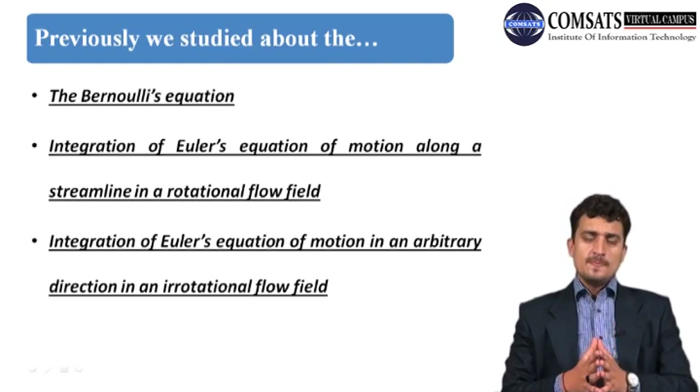आज इन्हीं चीज़ों को लेके आगे चलते हुए हम एप्लीकेशंस की तरफ जाएंगे, प्रैक्टिकल एप्लीकेशंस की तरफ, कि हाउ वी अप्लाई द बर्नौलीज इक्वेशन टू सॉल्व सर्टेन प्रॉब्लम्स ऑफ फ्लूइड मैकेनिक्स।

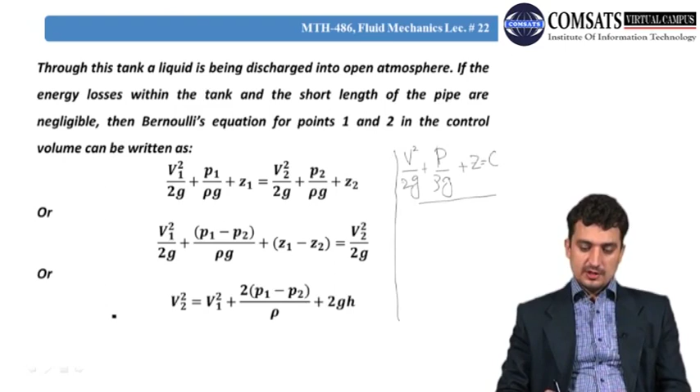So this was a very simple example of a tank. You can generalize it for any sort of tank, provided the energy losses within the tank and the short length of the pipe are negligible. By short length of the pipe, we mean this length is negligible, this short length out of the tank is negligible here.

Now this Bernoulli's equation can also be applied for liquid flow over a dam or a spillway. अगर आपको कोई डैम या स्पिलवे देखने का इत्तफाक हुआ हो तो आपने नोटिस किया होगा कि जब डैम के स्पिलवेज या उसके दरवाजे बंद कर दिए जाते हैं to store the liquid in it, और फिर जब वो खोले जाते हैं तो water flows out of them। तो जिस तरह water उन spillways से बाहर निकलता है, आप pressure, velocity, या elevation of the liquid calculate कर सकते हैं, Bernoulli's equation का इस्तेमाल करके।

For liquid flow over a dam or spillway, the Bernoulli's equation for an inviscid flow can be applied, provided friction losses for the short reach of flow under consideration are negligible. Obviously, since water is a viscous fluid or a Newtonian fluid, it will show viscous effects, but if we can neglect those viscous effects and frictional losses, then we can use the Bernoulli's equation, because it is the integrated form of the Euler's equation, which is valid only for inviscid or ideal fluids.

Now for the topmost streamline in the control volume, the pressure is atmospheric pressure and therefore constant at each point, and we may write Bernoulli's equation for points 1 and 2. अगर बॉटम पे और टॉप पे प्रेशर सेम और एटमॉस्फेरिक प्रेशर के इक्वल रख के उन दोनों को इक्वेट किया जाए तो हम simply terms containing the pressure को cancel out कर सकते हैं और remaining terms को compute कर सकते हैं, जैसा मैंने इस equation में किया है।

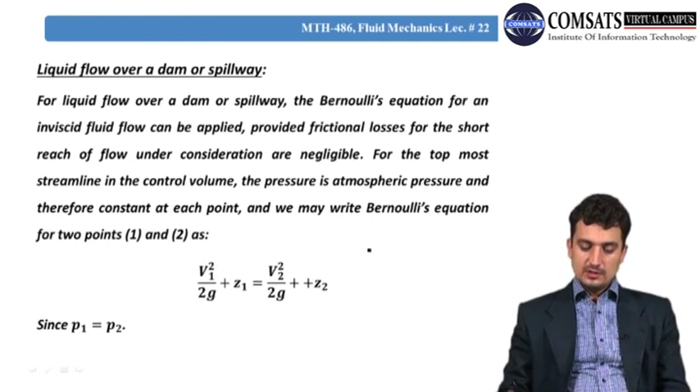So simply you can find out the velocity after the water has passed the spillway and the velocity before the water has passed the spillway, provided you know the velocity and elevation at other locations. अगर आपको किसी एक पॉइंट पे velocity and elevation known है तो आप किसी दूसरे पॉइंट की elevation पता होने के बाद उसकी velocity find out कर सकते हैं, in the case of a liquid flowing over a dam or spillway. The equation can be used to determine the velocity of the fluid at any one point, provided the velocity at the other point is known, and the elevation is known to you.

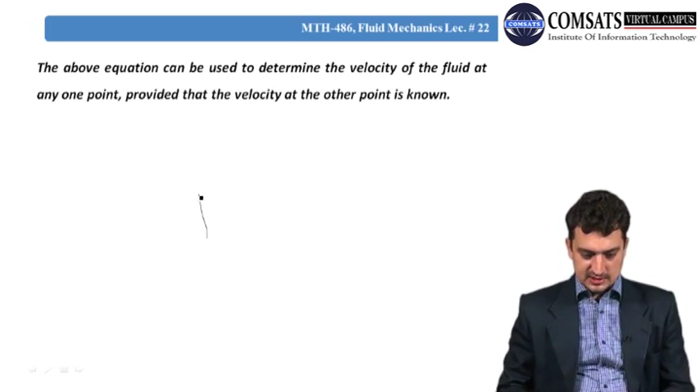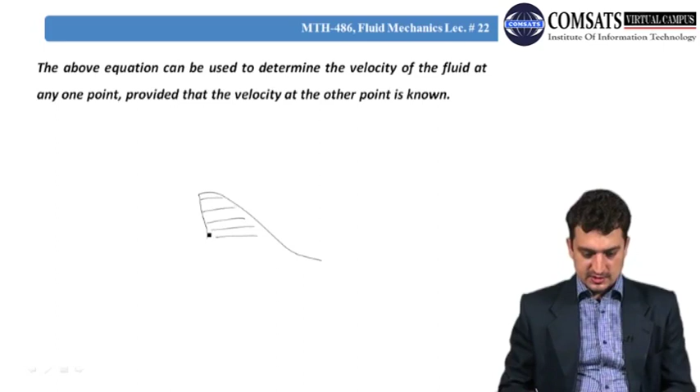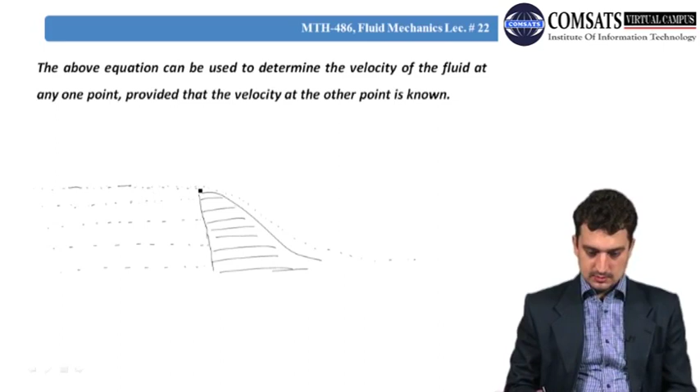और अगर आप इसको थोड़ा सा figuratively analyze करना चाहें तो यह कुछ ऐसा दिखेगा। Consider this as a spillway and water is flowing over it, say like this. I hope you can see these dotted lines which I am drawing here.

So like this, water spills over a dam or a spillway, and if you know this height, say इसको point 1 कह लें और इसको point 2 कह लें, and if you know this height, say Z1, and this height as Z2, and you know the pressure because it is in direct contact with the atmosphere, so P1 here is the atmospheric pressure, then you can use the velocity here, say V1, and if velocity here is V2, and obviously density and gravity will remain the same for these locations because it is water, so you can use the Bernoulli's equation to compute the velocity at location 2.

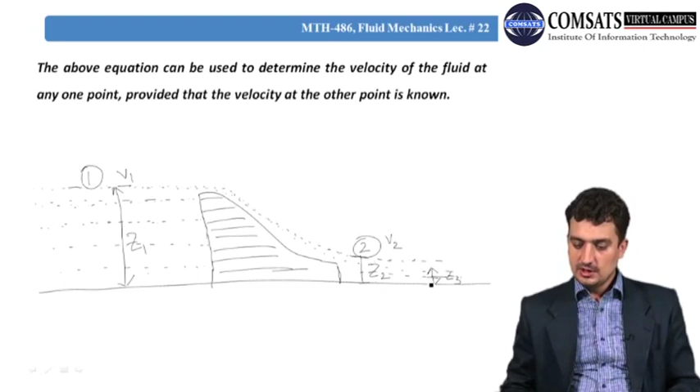अगर किसी भी पॉइंट से किसी और पॉइंट पे आप velocity find करना चाहते हैं at this location which is not at the surface, say Z3, you can also compute the velocity or the pressure of the fluid at this point making use of the Bernoulli's equation.

This is a big advantage of Bernoulli's equation. Next time you visit a dam, stand a bit far and observe when the spillways are open, how water flows smoothly before the spillway, and after that its velocity increases rapidly. As the elevation decreases near the spillway, the velocity definitely increases. So on the whole, the equation remains constant, and Bernoulli's equation remains constant.

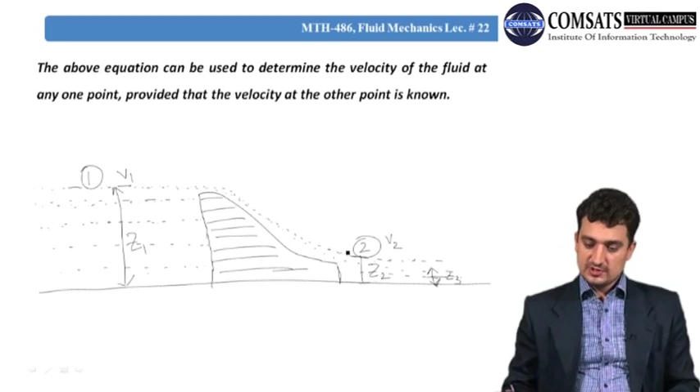If velocity increases before and after the spillway, and elevation also changes, then pressure will also vary if you are calculating the pressure within the flow field and not at the surface. If we calculate at the surface, we cancel out the pressure term, because the pressure at the surface remains atmospheric pressure.

Now let's go for an example: water is flowing through a pipe of 70 millimeter diameter under a gauge pressure of 3.5 kilogram per meter square and with a mean velocity of 1.5 meter per second. Neglecting the friction, determine the total head if the pipe is 7 meters above the datum line.

We are provided that water is flowing through a pipe of 70 millimeter diameter, and the gauge pressure is 3.5 kg per meter square. This is the pressure provided to us, with a mean velocity of 1.5 meter per second. Neglecting the friction, we have to determine the total head if the pipe is 7 meters above the datum line. Now let's start and let's see.

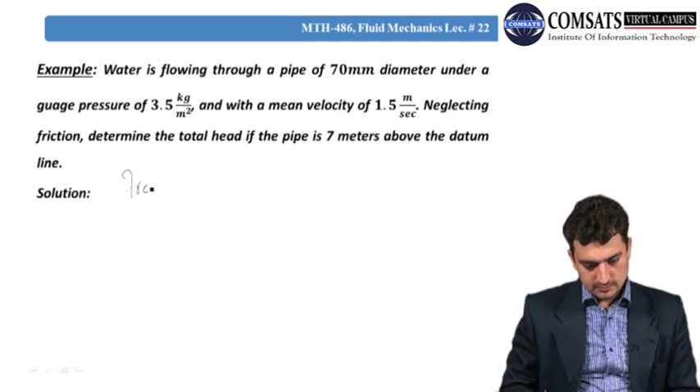First, make use of the Bernoulli's equation, and you should know what things we require here. Let's write down Bernoulli's equation first and see what we have to find out: P over rho g plus v square over 2g plus z, the elevation, is equal to h, a constant.

We have to calculate the total head. This is the total head - the pressure head, the kinetic head, and the elevation head. So this h needs to be found out. To find this h, we need to know the elevation, we need to know the velocity, we need to know the pressure.

This diameter is given to us, we'll see how we are going to use it. We are provided with the pressure here and a mean velocity of 1.5 meter per second. Then neglecting friction, determine the total head if pipe is 7 meters above the datum line. So elevation is also provided to us. Now let's start, name this as equation 1.

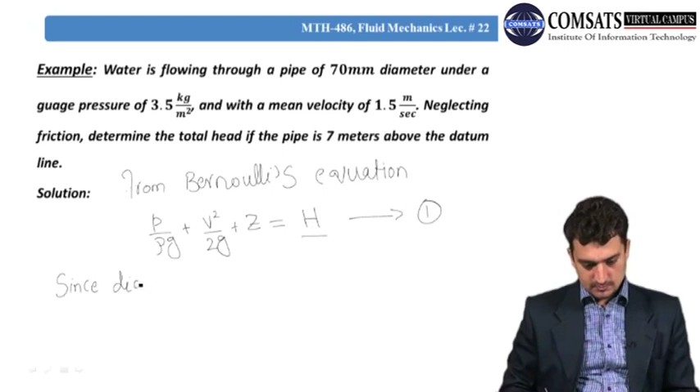Since diameter of pipe is 70 millimeter, or equal to 7 centimeter. Pressure P is equal to 3.5 kilogram per meter square. Keep in mind that this is in meter square - if this quantity were in centimeter square, we would have to convert it first into meter square, because other quantities are given accordingly, for instance velocity is given in meter per second, so we have to calculate in this manner.

Now velocity v is equal to 1.5 meter per second, and the elevation or z is 7 meters. Now z is known to us, velocity is known to us, pressure is known to us, and the pipe diameter is known to us. Let's see how we utilize this.

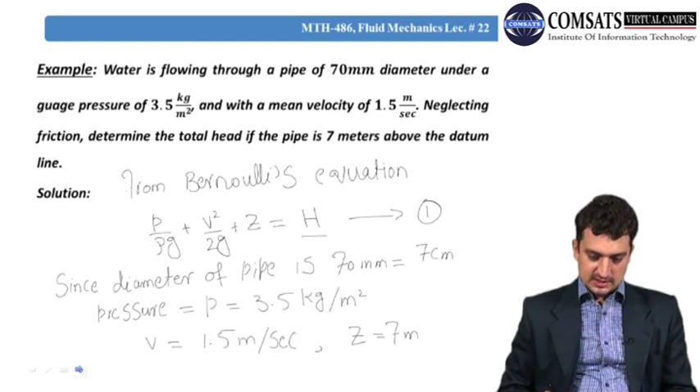So from equation 1, total head is given as h is equal to z plus v square over 2g plus p over rho g. This comes out to be, since z is 7 meter, 7 meter plus v square over 2g. V square is 1.5 square, because velocity is 1.5, 2 into this is 2, and the value of g is 9.81 meter per second, plus p, which is 3.5 kilogram per meter square, over rho g.

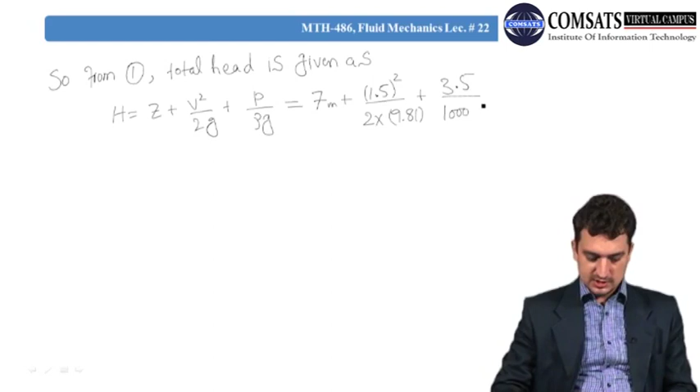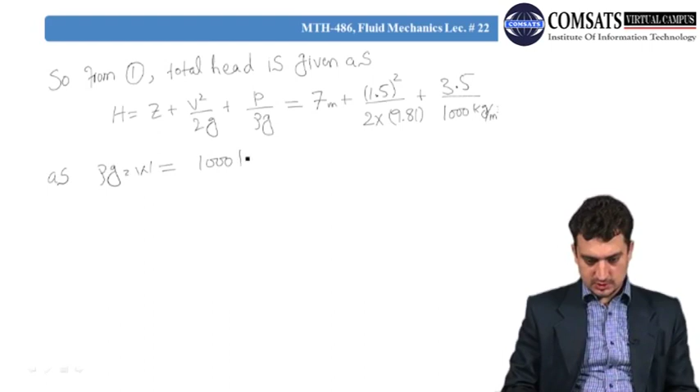अगर rho g की वैल्यू आप सब्स्टिट्यूट करें तो यह 1000 kilogram per meter cube है, as rho g is equal to specific weight and equal to 1000 kilogram per meter cube for water, and g is equal to 9.81 meter per second square। Now simply by adding these terms you can calculate the total head।

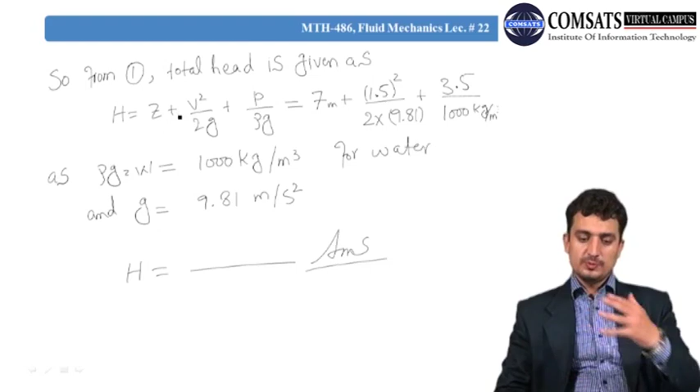अब एक और चीज़ ज़रूर ज़हन में रखें, जैसा कि इस simple example के अंदर कहा गया कि you have to calculate the total head, आपसे kinetic head के बारे में भी पूछा जा सकता है, आपसे velocity और elevation head के बारे में भी पूछा जा सकता है। So you should be familiar कि हम किस तरीके से चीज़ों को manipulate कर सकते हैं और कौन कौन सी चीज़ें इसमें vary होंगी और कौन कौन सी चीज़ें हमें चाहिए होंगी। So we first have to calculate those। This was a very simple example to start with, जिसमें I just wanted to make you people familiar कि किस तरीके से इसको workout किया जाएगा।

Now let's move to the next example, which states that water is flowing through a tapered pipe having diameters 15 centimeter and 5 centimeter at the larger and smaller ends respectively. Determine the velocity head and the rate of discharge in liters per second at the smaller end if the velocity of water at larger end is 2.5 meter per second. Now we have to determine the velocity head and the rate of discharge in liter per second at the smaller end, provided we are provided with the velocity of water at the larger end.

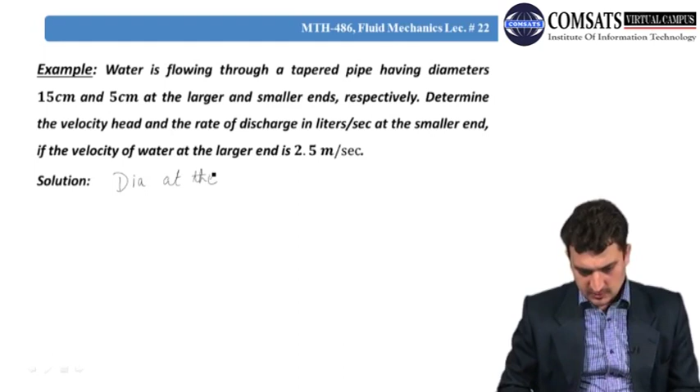And let's see how we pursue with this example, since it is given to us that diameter at the larger end is 15 centimeter or equal to 0.15 meter. Here it is given that diameter is 15 centimeter and 5 centimeter at the larger and smaller ends respectively. So diameter at the larger end is 0.15 meters.

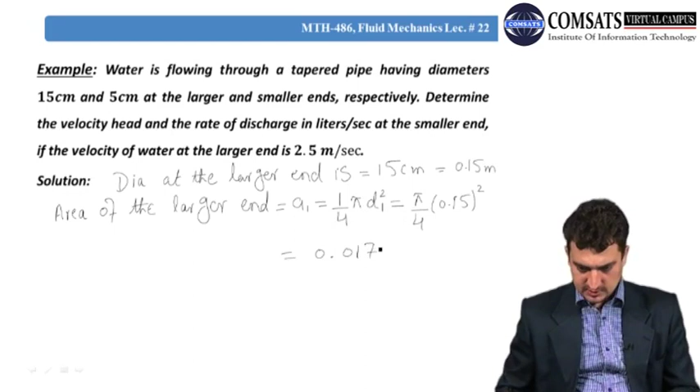Now making use of this, area of the larger end, और इसको A1 का नाम दे देते हैं, is equal to 1/4 pi d1 square। This comes out to be pi/4 into 0.15 whole square, which is equal to 0.01767 meter square। Making use of the calculator, you can verify this value of the area, whether I have written it correctly or not। I leave it up to you to verify this whenever you are going through this lecture again, and name this as equation 1।

Now similarly, diameter of the smaller end is 5 centimeter or equal to 0.05 meter, and area of the smaller end is equal to A2, A2 से इसको represent किया, and pi/4 d2 square, which is the diameter, and it comes out to be equal to 0.00196 meter square। Name this as equation 2 here।

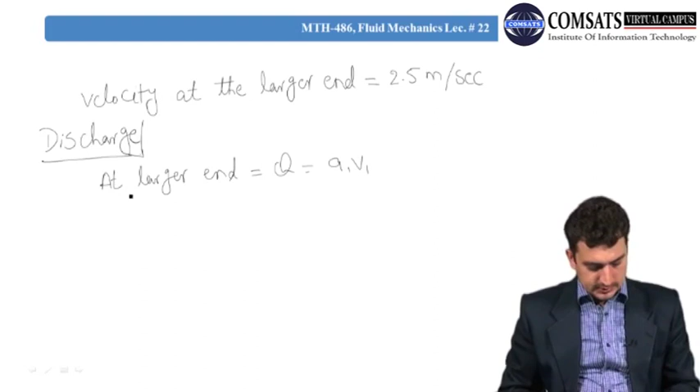Now at smaller end, flow or discharge is equal to A2 into V2।

Velocity at that point into area of the smaller end will give us the discharge at the smaller end. Since discharge is continuous, so discharge at both ends will be equal to each other.

A1 V1 is equal to A2 V2, or from here you can write that V2, the velocity at the smaller end, is equal to A1 V1 over A2. We can name this as equation 3 and this as equation 4. Let's label these two equations as 3a.

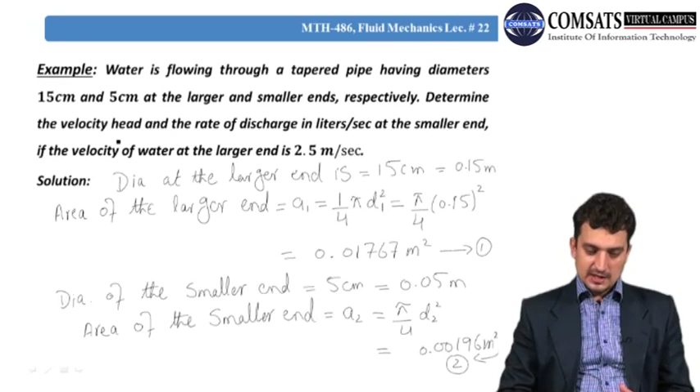We have to calculate the velocity head at the smaller end as well as the rate of discharge at the smaller end. So until now we have only calculated velocity at the smaller end, and we will make use of this to calculate the discharge at location 2, the smaller end.

Now using 2 and 5 in 3A, we get Q, which is the discharge at the smaller end. Discharge at the smaller end is the product of area of the smaller end and the velocity at the smaller end. So we have calculated the area, and we have also calculated the velocity at the smaller end.

So area value is 0.00196 and velocity is 22.5 meter per second, and it comes out to be 0.0441 meter cube per second, or equal to 44.1 liters per second. So this is the discharge at the smaller end, which we have calculated making use of the area of the smaller end and the velocity at the smaller end.

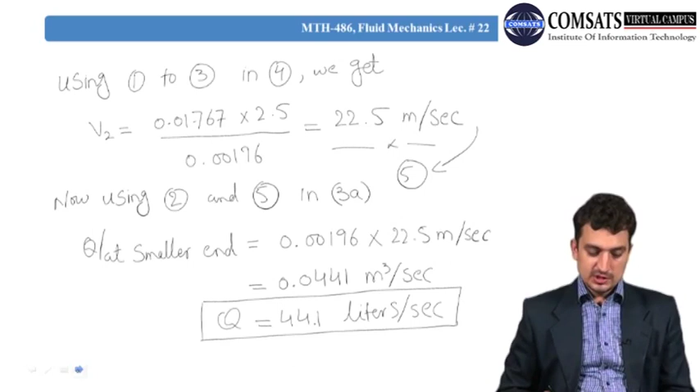Now for the second thing, we had to calculate the velocity head here, so we will pursue towards that now.

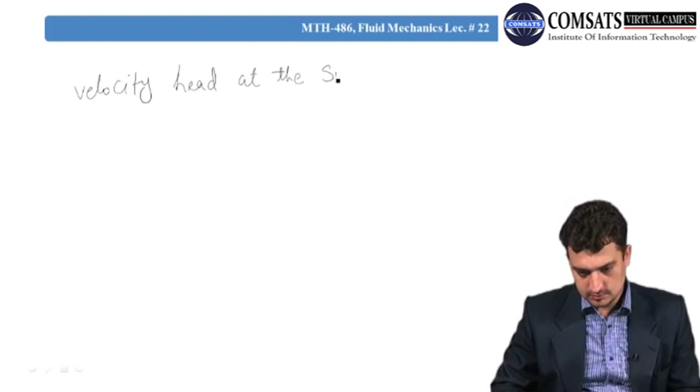Velocity head - and what is the other name of velocity head? You should be knowing that it is the kinetic head at the smaller end. This is equal to V square over 2G. So obviously V2, because we named the velocity at the smaller end as V2. So this is, on the whole, the velocity head at location 2, the smaller end.

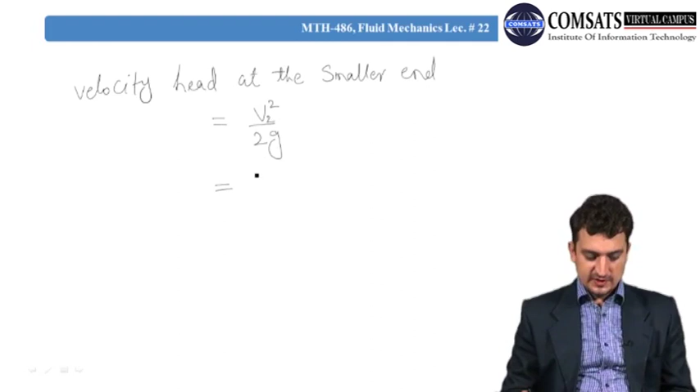Simply substitute the values of velocity and gravity here. The velocity at point 2, the smaller end, was 22.5 meter per second, so it's 22.5 square over 2 into 9.81 meter per second square. So the velocity head comes out to be 25.81 meter.

Again, verify these values to see what these calculations give. This is how we found out the velocity head.

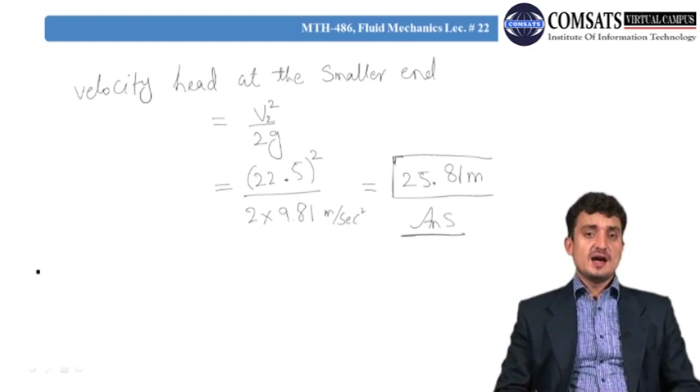If we were asked for elevation head, we would find it similarly, which is simply equal to z itself, the elevation at location 2, the smaller end. And if we were asked for pressure head, we would calculate pressure too, making use of this, provided we knew the pressure at location 1 - then we could find out the pressure at location 2 as well.

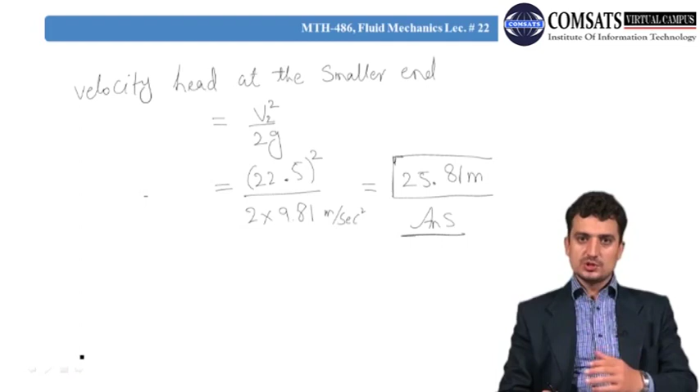So this is how we use Bernoulli's equation to solve word problems and calculate different values of different parameters at different locations.

Now consider one more example in which the diameter of a pipe changes from 20 centimeter at a section 5 meter above datum to 5 centimeter at a section 3 meters above datum. The pressure of water at the first section is 5 kilogram per centimeter square. If the velocity of flow at the first section is 1 meter per second, then determine the intensity of pressure at the second section for water. Rho g is equal to 1.

So we have written it simply as 1, making use of these quantities. Now we have to determine the intensity of pressure at the second location. We need to find the pressure at location 2. What is provided to us?

It is given that diameter of a pipe changes from 20 centimeter at a section 5 meter above datum to 5 centimeter at a section 3 meters above datum. Let's draw the diagram for easier understanding. If this is the datum line, then the statement of the problem tells us there is a pipe whose diameter is changing from 20 centimeter to 5 centimeters.

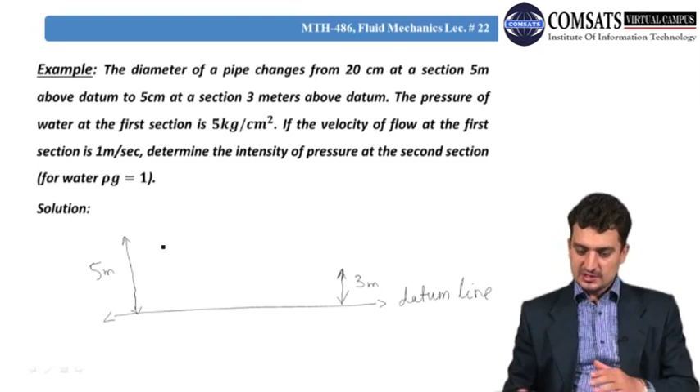Take this as 5 meter and take this as 3 meters here. So as we move from 5 meter to 3 meter, the diameter of the pipe changes from 20 centimeter

to 5 centimeter here. Now this is the datum line, plus the pressure at the first section is 5 kilogram per centimeter square. The pressure is provided to us at the first location, and if the velocity at the first section is 1 meter per second, this is the velocity at the first section of the pipe, and we have to calculate the pressure at the second section of the pipe.

So consider this geometry. This is air and water is flowing in this pipe like this. Simply, there is a pipe whose diameter is changing: 20 centimeter at one end, and at the other end its diameter is 5 centimeter, and the difference of height between both ends is 2 meter, and the lower end is at 3 meters from the datum line, and we have to calculate the intensity of the pressure.

Now, diameter of pipe at section 1 is 20 centimeter. Let's name it D1, and it is 20 centimeter, not meters. It is 20 centimeter here, and we name it D1. Also, if you like, you can mark these sections as section 1 and section 2.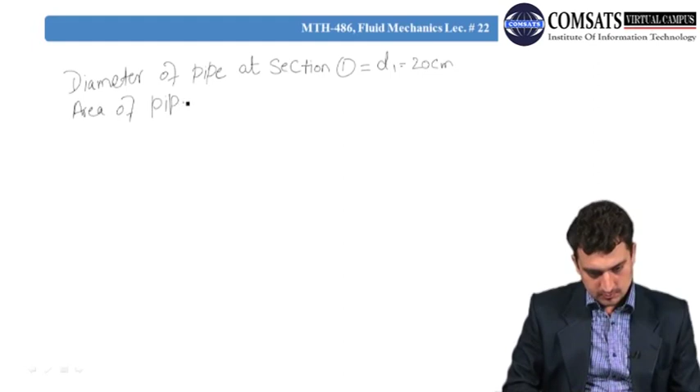Now area of pipe at section 1 is equal to A1, which is pi by 4 times D1 square, this comes out to be equal to 100 pi centimeter square.

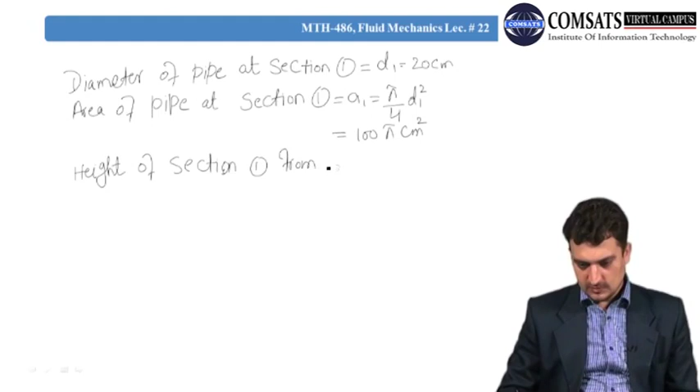Further, height of section 1 from datum. The height from datum to section 1 is 5 meter. Now because the diameter is given in centimeter, either you can convert the diameter into meters or you can convert the height above the datum into centimeters.

We have converted centimeter to meters many times before. Let's this time go the other way around, and convert the meters into centimeters so that you should be familiar with both cases. Now if it is 5 meter, then it becomes 500 centimeter, and name this as Z1.

Now, diameter of pipe at section 2. At section 2 the diameter is equal to D2, and that is equal to 5 centimeter, and area of pipe at section 2 is A2, equal to pi by 4 D2 square, and this comes out to be equal to 6.25 pi centimeter square.

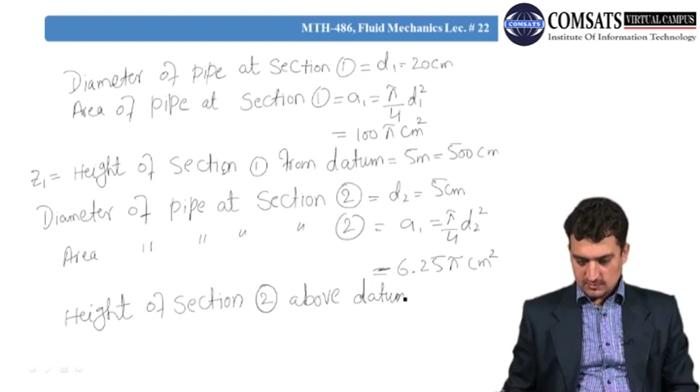And height of section 2 above datum. Height is given as 3 meter, name this as Z2, and it is equal to 300 centimeter. Now we are provided with all the data we had.

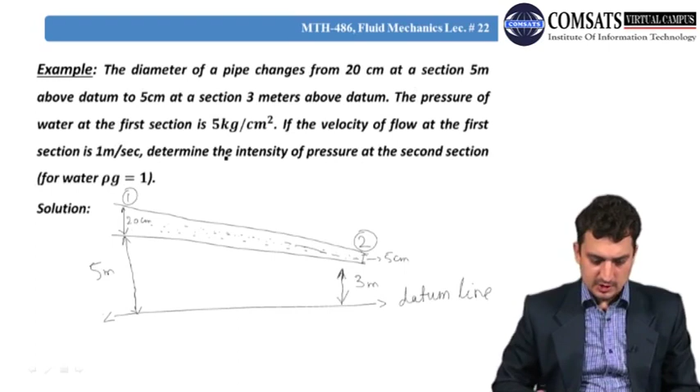Now let's move on. We have to calculate what? We have to know the pressure. Pressure at section 1, name it P1. It is given that it is equal to 5 kilogram per centimeter square.

Per centimeter square, and since अगर इसको हम किलोग्राम पर सेंटीमीटर की बजाय ग्राम पर सेंटीमीटर में रखें तो it becomes 5000 ग्राम पर सेंटीमीटर स्क्वायर. ग्राम में क्यों कन्वर्ट किया किलोग्राम से? बिकॉज वी यूजिंग दिस सेंटीमीटर, सो इट विल बी रादर कन्वीनियंट टू कन्वर्ट इट इनटू ग्राम्स इंस्टेड ऑफ द kilograms.

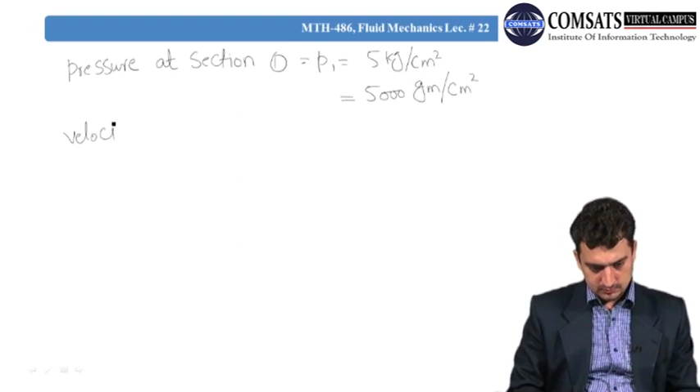Now velocity at section 1 is V1. It's 1 meter per second or 100 centimeter per second. Let now V2 is equal to the velocity

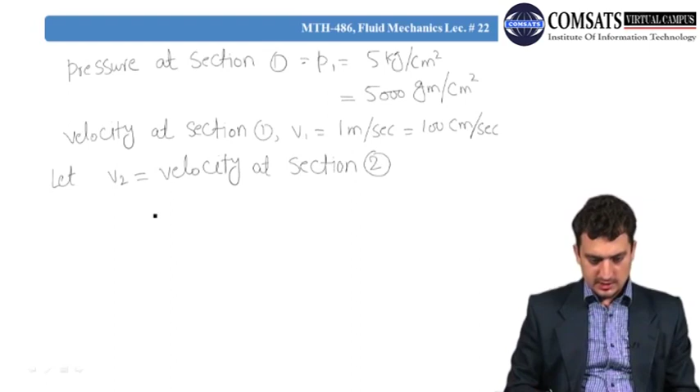at section 2, and P2 is pressure at section 2, in kilogram per centimeter square. Now we know that

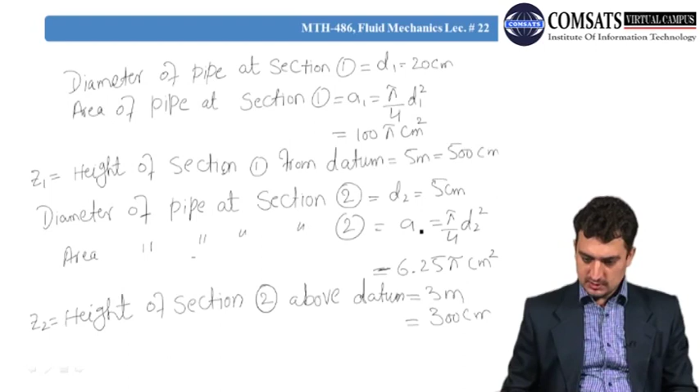the continuity of discharge tells us that A1 V1 is equal to A2 V2. So from here V2 is equal to A1 V1 over A2, which is 100 pi into 100, which is the V1 or the velocity at section 1 given here, over A2, which is here it is A2, not A1, A2, and A2 is equal to 6.25 pi, and it comes out to be equal to 1600 centimeter per second, which is V2 according to our calculation making use of the continuity equation.

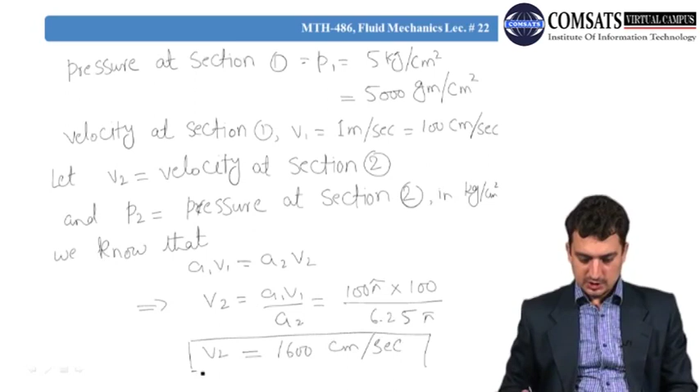So V2 हमने find out कर ली. Now let's move towards the application of the Bernoulli's equation here.

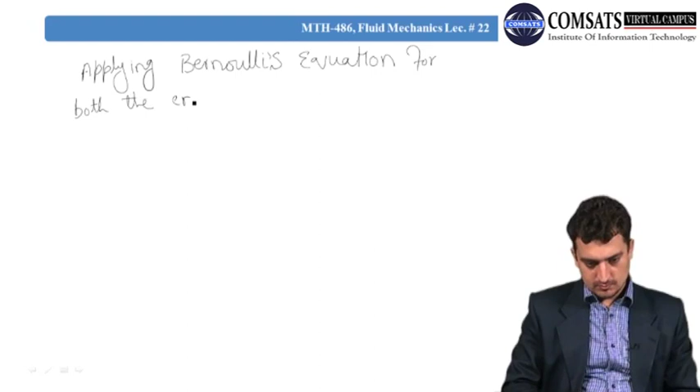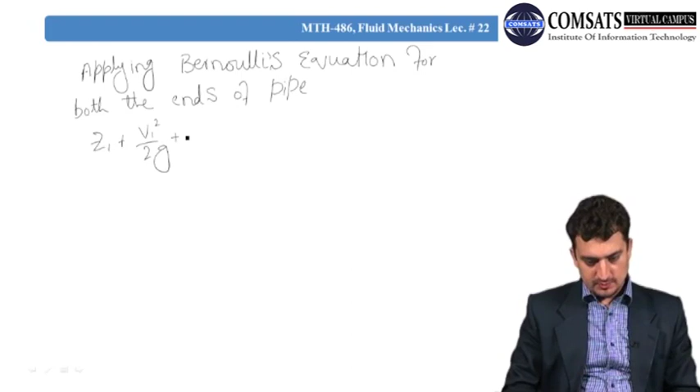Applying Bernoulli's equation for both the ends of pipe, we get Z1 plus V1 square over 2G plus P1 over rho G is equal to Z2 plus V2 square over 2G plus P2 over rho G, and Z1 because it's the height above the bottom of

section 1, and it was 500 because it was 5 meter, so it is 500 centimeter plus 100, which was the velocity at section 1, 2 into since G is 9.8 meter per second square, and when you convert it into centimeter per second square, it simply can be written as 981 plus 5000 grams per centimeter square over rho G, which is 1 converted into this scale, is equal to 300, the value

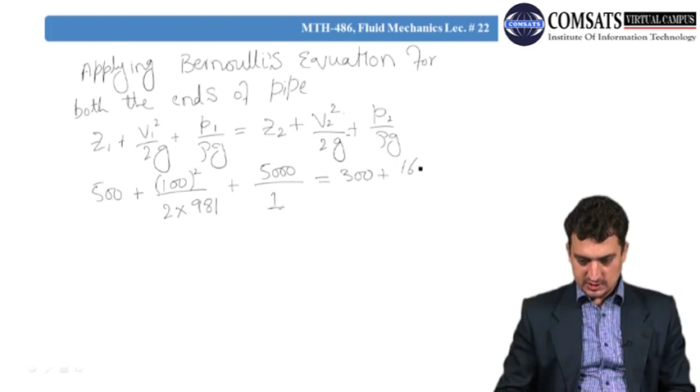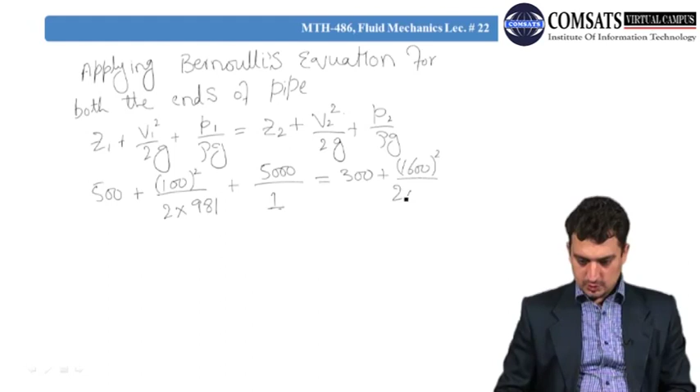of Z2 plus V2 we have also calculated. This came out to be 1600 if I'm... 1600 square over 2 into 981 plus P2 over rho G, which is 1 again. So simply add up these things and calculate the value of P2. This comes out to be 3.9 kilogram per centimeter square.

So ऐसे अगर हमें velocity and pressure की वैल्यू किसी दो locations के ऊपर मालूम हो, तो हम किसी तीसरी location पे भी velocity की वैल्यू find out कर सकते हैं, provided हमें height का difference दोनों points का known हो। This is how we use the Bernoulli's equation, and this is how we solve these equations to calculate different values of say pressure and velocity and elevation at different locations.

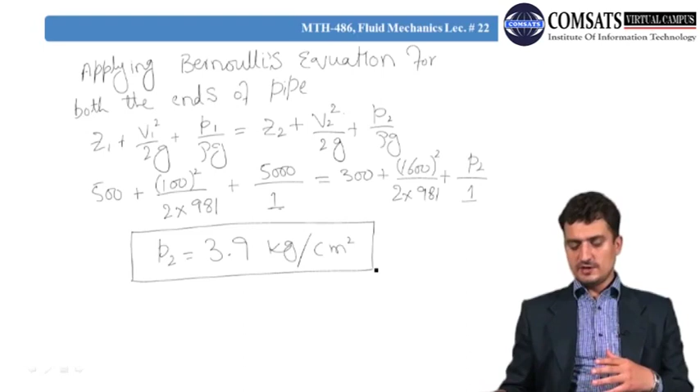But there are certain limitations of the Bernoulli's equation. Take for instance the Bernoulli's theorem or the Bernoulli's equation has been derived on certain assumptions which are rarely possible. Thus the Bernoulli's theorem has the following limitations.

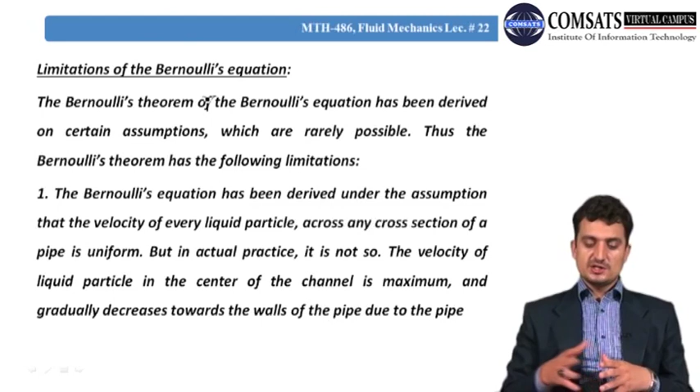First, the Bernoulli's equation has been derived under the assumption that the velocity of every liquid particle across any cross section of a pipe is uniform, but in actual practice it is not. The velocity of a liquid particle in the center of the channel is maximum and gradually decreases towards the walls of the pipe due to the pipe friction. Thus, while using the Bernoulli's equation, only the mean velocity of the fluid should be taken into account.

I've been telling you again and again कि जब भी fluid flows through a pipe or a channel, तो pipe के center में fluid की velocity maximum होती है और ये reduce हो जाती है जैसे जैसे we move towards the walls of the pipe. But in Bernoulli's equation, we take the velocity to be uniform at all points, but in reality it is not the case. So whenever we are going through the application of the Bernoulli's equation, we must take into account the average velocity instead of the overall velocity or the velocity at different locations.

Secondly, the Bernoulli's equation has been derived under the assumption that no external force except the gravitational force is acting on the liquid, but in actual practice it is not. There are always some external forces such as pipe friction acting on the liquid. Thus, while using the Bernoulli's equation, all such external forces should be neglected. But if some energy is supplied to or extracted from the flow, the same should be taken into account.

Bernoulli's equation की derivation के दौरान I kept telling you that only the gravitational forces are taken into account, but there can be other forces acting on the fluid as well, जो कि हम Bernoulli's equation के अंदर consider नहीं करते। This can also alter the results. For example, pipe friction, or कोई external magnetic या electric field का effect जो है वो नहीं discuss करते। So this consideration can alter our results by a great amount.

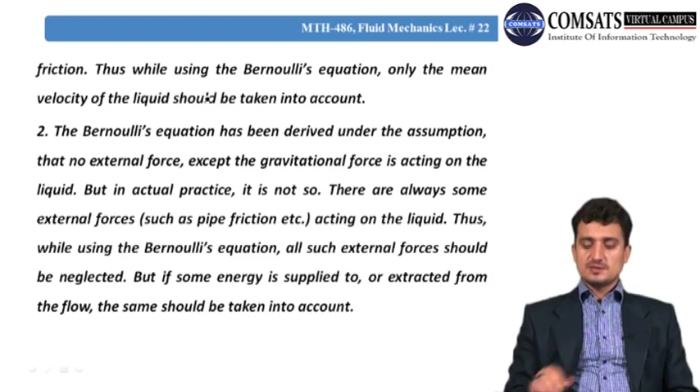Bernoulli's equation has been derived under the assumption that there is no loss of energy of the liquid particle while flowing, but in actual practice it is rarely so. In a turbulent flow, some kinetic energy is converted into heat energy, and in a viscous flow some energy is lost due to shear stress. Thus, while using Bernoulli's equation, all such losses should be neglected.

I told you again at the time of Bernoulli's equation derivation that we neglect all the viscous effects because it is simply the integrated form of the Euler's equation of motion. So we neglect the energy losses due to the viscous forces.

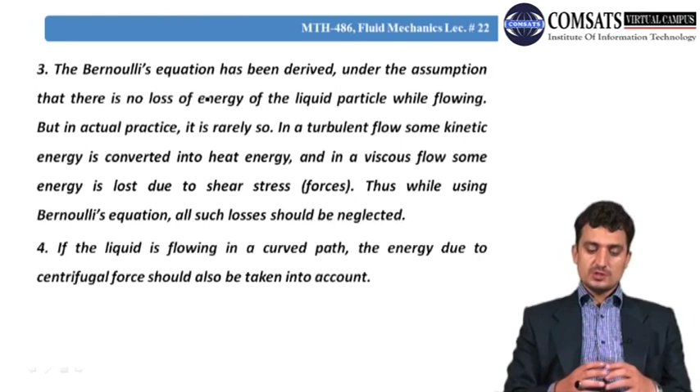If the liquid is flowing in a curved path, the energy due to centrifugal force should also be taken into account. Again, if the fluid is moving in a curved domain, then there will be centrifugal force as well, and we must take that into account.

Practical applications of Bernoulli's equation can be seen in the venturimeter, which is an apparatus for finding out the discharge of a liquid flowing in a pipe; in the orifice meter, which is used to determine the discharge in a pipe; and the pitot tube, which is an instrument to determine the velocity of flow at the required point in a stream.

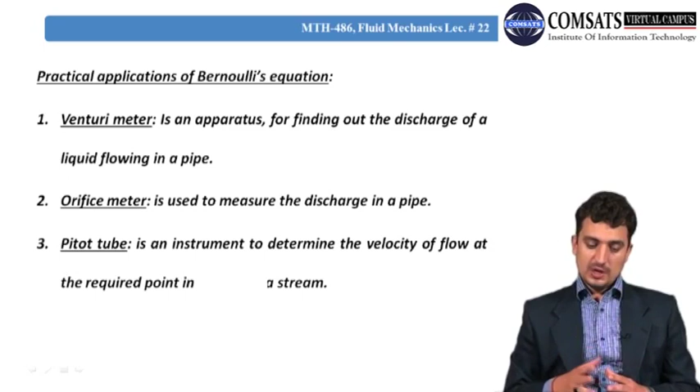Now with this I take you towards the summary of today's lecture. In today's lecture, we went through the applications of Bernoulli's equation. We saw the application of Bernoulli's equation, particularly the flow in a liquid or a water tank and the liquid flow over a spillway of a dam.

Then we solved some word problems and made use of Bernoulli's equation to determine the pressure and velocity at different locations, provided that some of the values of the unknowns or variables were known to us. So at any one point, if we know the velocity, pressure and elevation, then at another point we can calculate these, provided some of them are known to us. So then at the end we went through the practical applications of Bernoulli's equation.

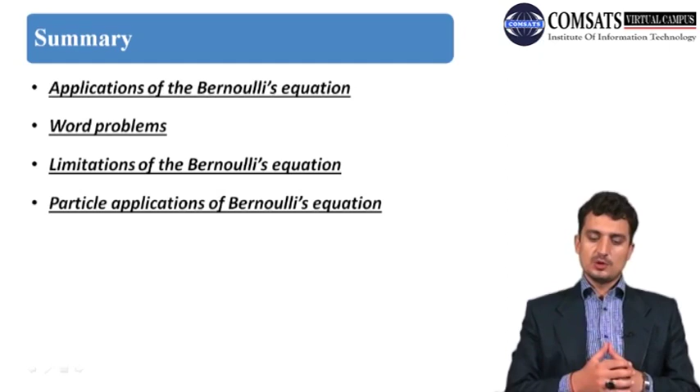In which I shared with you the names of some instruments, which made use of Bernoulli's equation to calculate the flow rate and the discharge rate.

And with this, it's time for today's quote. Make use of the fact that most of the times when I'm teaching in the class, the students are always there and keep asking that we are not very lucky and we have bad luck, sort of a thing.

So I always tell my students one thing: write down the word LUCK in front of you and analyze it, analyze each letter of it. It's a combination of 4 letters: L, U, C, K. There was once a philosopher who said that the letter L in luck stands for labor, U for understanding, C for character, and K for knowledge. So labor - if you work hard and continuously work hard, you can make up your own luck.